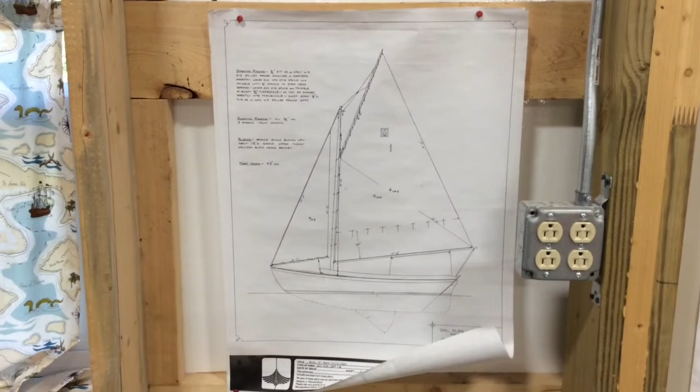All right, here we go. I am seriously working on, at least in my head, the mast. We've got this view of it here, and then there's quite detailed description at the top of this page.

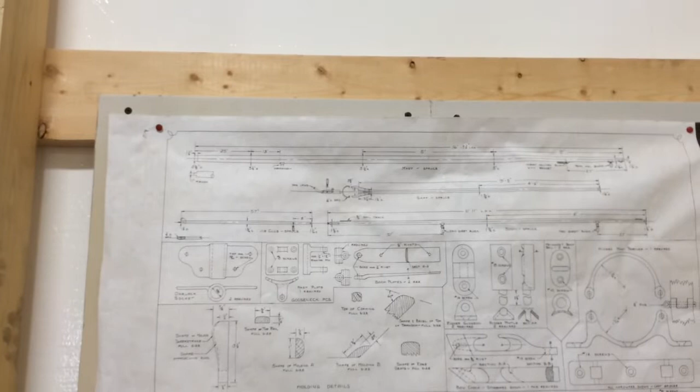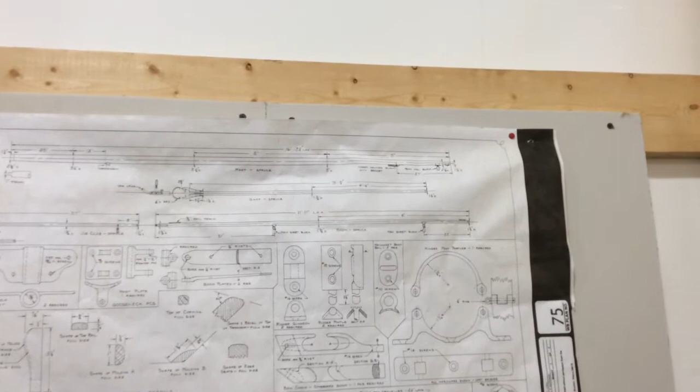This mast is tapered in some ways. At the very lowest part, which would be there at the left at the top, it shows that it's 2 5/8 in diameter. Most of the rest of the mast is 3 1/4 inches in diameter until you get to the very top, where it tapers down to, I believe, 3 inches. And even at the very top, looks like it even goes down to 2 1/8.

So I had a thought about using my old mast that I fashioned for the Demon 15. This mast is about 21, a little better than 21 feet. And this was made out of 2x4 pieces of Douglas fir that were laminated together, and there's a whole video on when I made this particular mast, and we'll try to link that later. So I've pretty much decided to not use this and create a new one.

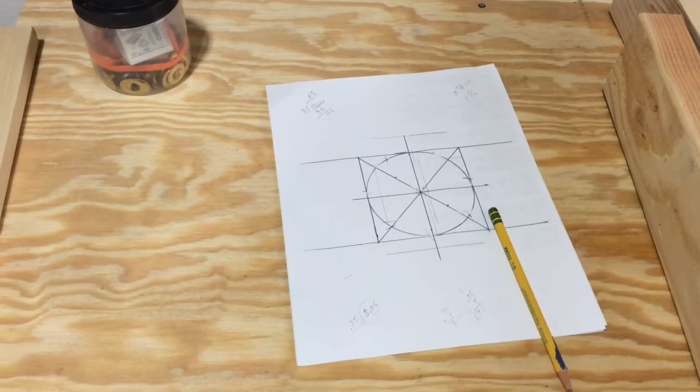So that leads to the question, how to do it. There's the mast hoops right there. Knowing that it has to be 3 1/4 inches in diameter, I had this little jar here with the plastic lid on it, and the thing is like 3 3/8. So it's just an eighth larger than the biggest diameter that I need. So I just traced it, and then I drew some lines on here to find the center of it. And I started thinking about trying to do a bird's mouth type construction.

The bird's mouth would probably solve some issues as far as being able to find the appropriate length of stock, being that I need 16, I think it's 16 foot 3 1/2 inches. I'm probably going to be piecing wood together in order to obtain that. And if I had staves with bird's mouth cuts in them, you could do that and stagger them around the circle and probably achieve a lot of strength.

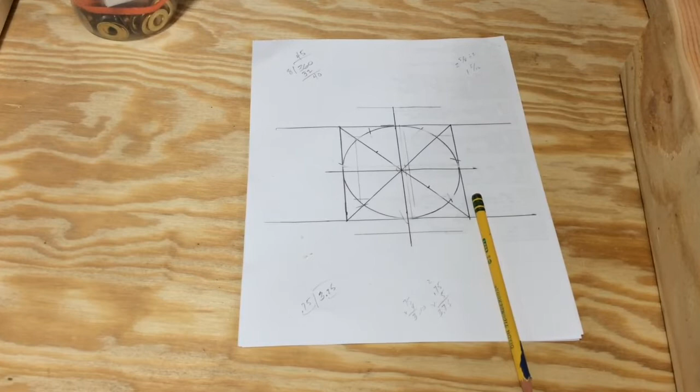But the more I considered it, the more I can't figure out how to make it thick enough to where when I am at that 2 5/8 diameter at the bottom, or even narrower at the top, that I don't create too much weakness within it, because I just simply won't have that much wood in the different staves. So I'm pretty much abandoning the idea of doing a bird's mouth. I believe the plan pretty much calls for a solid piece, and we've got a 600-pound keel, so I'm not super worried about the weight aloft, especially since it's going to be gaff rigged.

As usual, this is a thought process, and you're getting a full dose of how my brain works as I try to figure these things out.

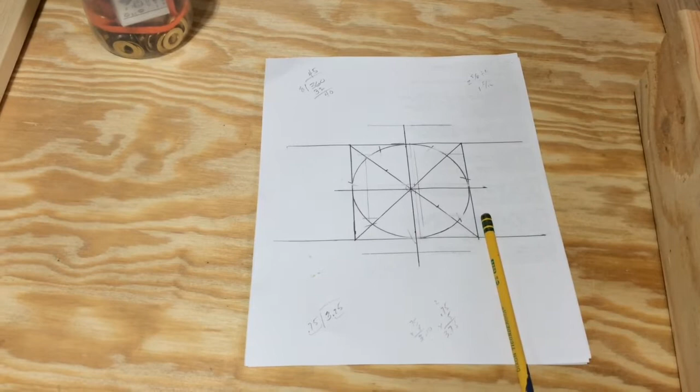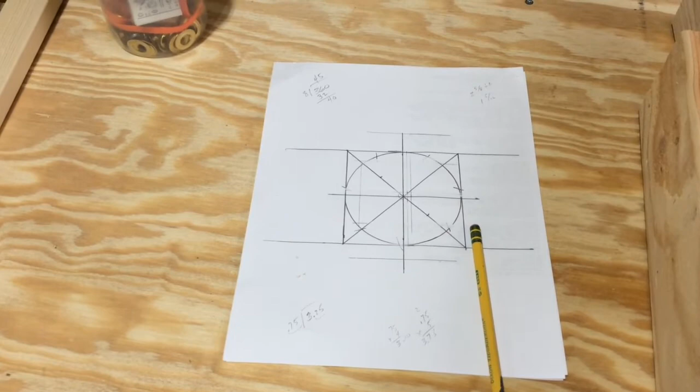I've looked for a 4x4, would be perfect. 4x4 dimensional lumber is about 3.5 by 3.5, and you'd only have to take off a little bit to get to your 3.25, which is the largest diameter of the mast. So that would be relatively easy, but most of the 4x4 material you find today, at least at the box stores, is treated, and we certainly don't want that. Now I think I've got a line on some Douglas fir that's 4x4, and if I can get that, that pretty much just answers all the questions, because that's just what we'll do.

The next question will be, do I go ahead and try to buy a 16 or an 18 foot length, or do I piece together a couple of pieces? And that'll be the next thing to consider. So, more as we progress.

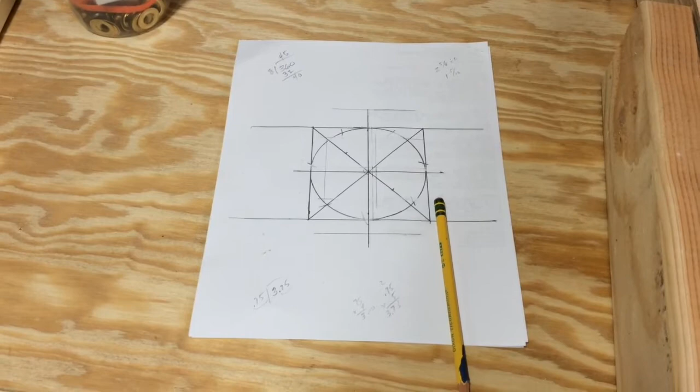I was all happy last night when I finally came to the idea that I should be able to get 4x4 Douglas fir at Menards. So I went over there this afternoon, and it was raining, and the guy in the yard had no idea where these 4x4s were. It's not something they sell every day. These are 10 foot 4x4, about 3.5 by 3.5, Douglas fir.

But I'm really unhappy, and I'm kind of unhappy with myself because I was in a hurry, and I should have taken my time and looked at them. See that little check down there? Some of these knots are troubling at the least, and that's got a check right up in the middle of it.

So my thought was that I would splice these together to get my 16-foot mast. The website says they've got 12, 14, and 16 foot, but I figured 16 foot wouldn't do it because it's got to be 16 foot 3.5 inches. So I thought I'm going to have to splice them together anyway. This will fit in the truck okay. I think I'm going to take them back.